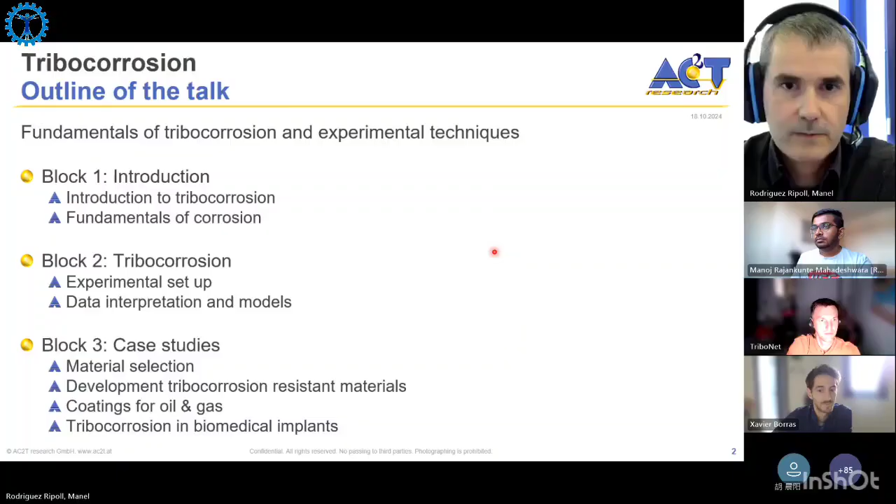Starting with the first block, the introduction, I would like to define what is tribocorrosion. Tribocorrosion is the material degradation due to the action of wear in a chemically reactive environment. It means we have a material in a place that is chemically reactive, and wear occurs simultaneously with potential chemical reactions that can occur with the environment.

This can be because the material is in an aqueous solution, in an electrolyte, in an acidic media, because it's in hydrogen environment, because it's in ammonia, or because it's in CO2 or H2S corrosive environment.

So this is probably the main difference with tribochemistry. In tribochemistry, you have chemistry because you have shear stresses. If you don't have the shear stresses, you don't have the chemistry typically. So it's a chemical process activated by shear forces.

In the case of tribocorrosion, the material reacts with the media, even if you don't have any mechanical wear. But when you have wear and the material simultaneously reacting with the environment, then that's what we talk about as tribocorrosion.

And here we need to talk about the kinetics of the process, because if you have a process where the wear is progressing much faster than corrosion, probably you can ignore corrosion, or vice versa. If you have a wear process that is much lower when compared to the corrosion progress, then you can ignore wear and probably you have a pure corrosion process.

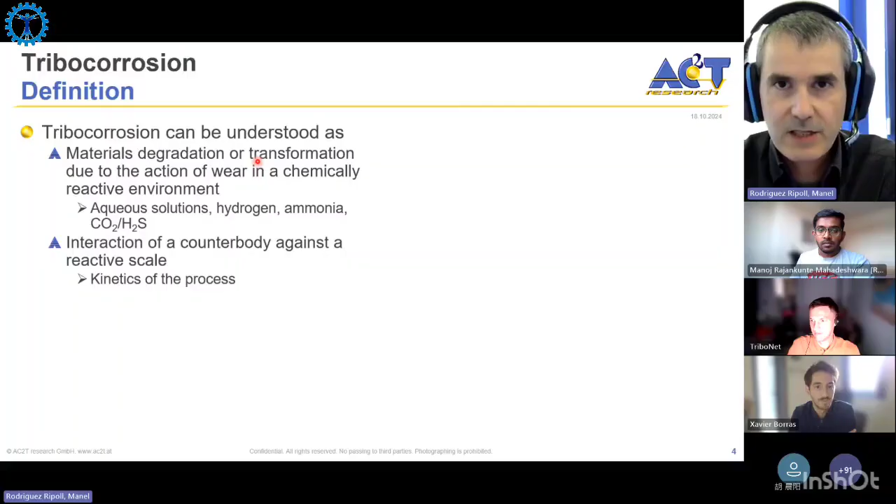So this plays a bit, but basically what we will focus on today is the synergy, and this synergy is most visible in passive metals, because passive metals are metals that are corrosion resistant.

These metals are used to protect components against corrosion, and they rely on the spontaneous formation of a passive layer. When we mechanically destroy this passive layer, we have the paradox that a metal that should be corrosion resistant starts corroding. That's the place where tribocorrosion is most obvious, and it's the place that has been most intensively researched in recent years.

And this occurs in many industries, ranging from biomedical to offshore, marine, the food industry, even in magnetic devices you can have tribocorrosion, in cutting tools, or you can have desired tribocorrosion. So you can exploit tribocorrosion processes in chemical mechanical polishing for producing very smooth samples.

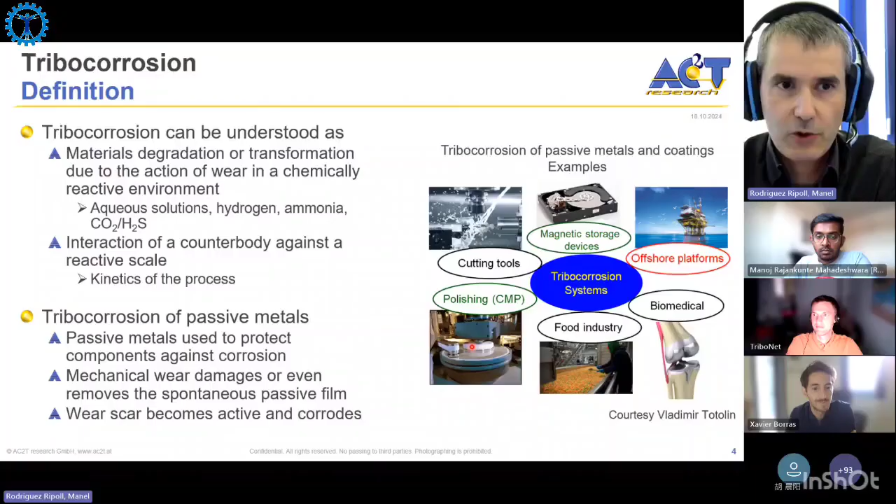So tribocorrosion does not always need to be negative. And the main challenge when we talk about tribocorrosion is that to select materials that are able to control tribocorrosion, to be tribocorrosion resistant, we cannot rely on separate corrosion and wear evaluations.

So if we take a material that is corrosion resistant and we take a material that is wear resistant, we cannot automatically assume that this material will be resistant against tribocorrosion.

One paradigmatic example is titanium nitride coatings. This is a coating that has excellent wear resistance, used in many cutting tool applications. It also has very good corrosion resistance in most aqueous environments, but it is a material that is very prone to tribocorrosion.

You can see, for example, in this graph the removed wear volume as a function of the electrode potential. For example, if you have cathodic potential, where mostly corrosion is inhibited, we have very low wear, close to the pure mechanical wear.

And when we apply an anodic potential, the tribocorrosion wear can be up to 2 orders of magnitude larger.

So it means that we need to use tribocorrosion methods to evaluate materials that are suitable for tribocorrosion applications. The separate consideration of wear and corrosion will very often be misleading.

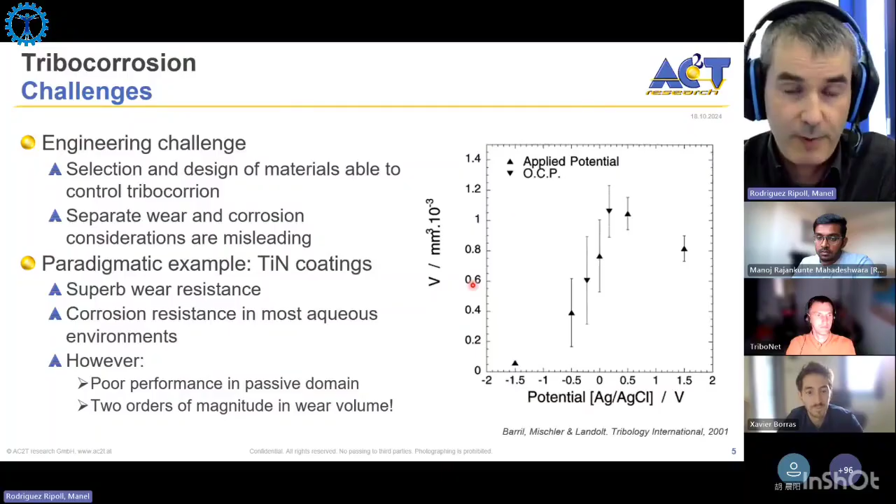And in order to tackle these tribocorrosion challenges, I will give a very brief introduction to some fundamentals of corrosion very quickly—a bit superficial, but so that you know the main concepts that I will be talking about later.

The most important thing to realize when we have metals exposed to the environment is that very often they degrade by corrosion. We know, for example, the example of ships in marine applications, pipelines, bridges. All these materials end up having this kind of rust because they react with the environment.

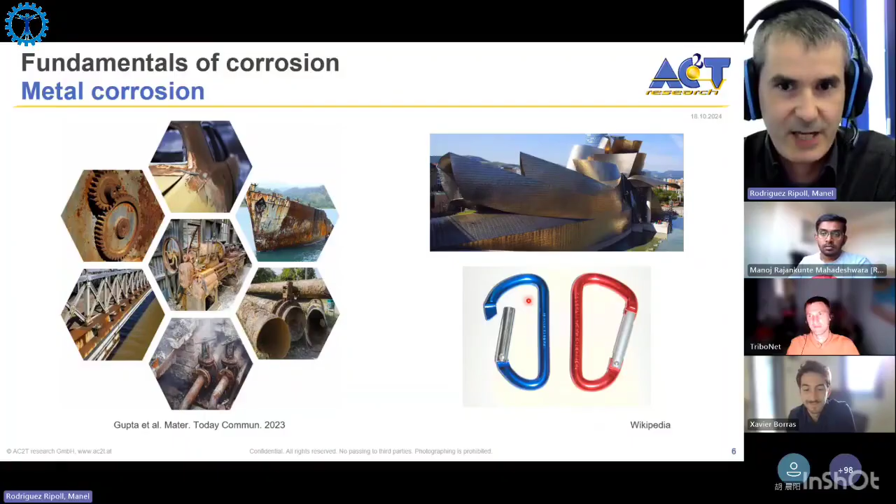However, many other materials are exposed to the environment, like this roof of the Guggenheim Museum in Bilbao, or these aluminum components, and actually they do not get any rust. So why is that? This is because there are different processes involved.

Some metals, when they get exposed to an electrolyte, basically dissolve. So you have a metal that turns into an ion and emits some electrons. For example, iron—you have a piece of iron, and some atoms of the iron will dissolve into the electrolyte and emit electrons.

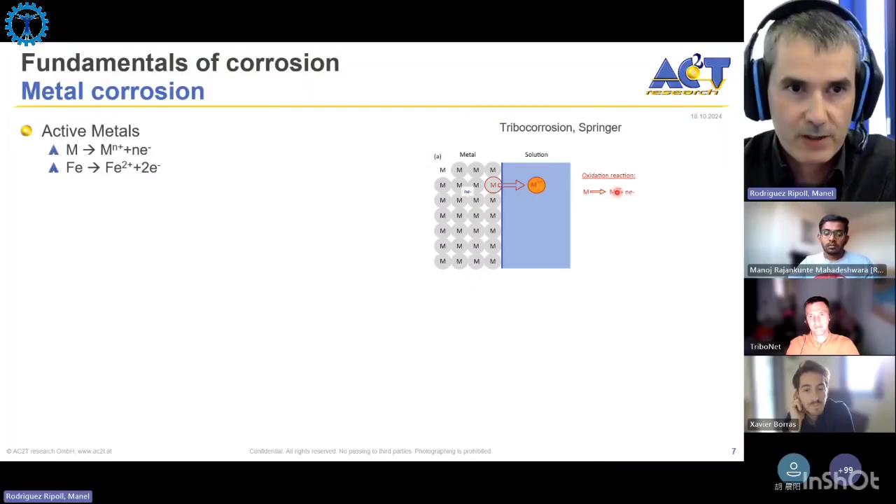However, other metals build up a spontaneous passive layer. Basically the process, if you sum it up, is the same: a metal ends up having a dissolved metal ion and some electrons. But this is done in two different steps. The first step is an oxide formation, where the metal reacts with water and forms an oxide layer with the emission of some protons and electrons. Then in the next step, this metal oxide can dissolve, react with the protons, and end up dissolving, releasing water again.

This is, for example, the case of aluminum. That's the reason why aluminum components look shiny after exposure to the environment. Aluminum reacts in aqueous solutions to form a spontaneous passive aluminum oxide layer, and this oxide dissolution is a very slow process. That's the reason why these metals do not really corrode.

What happens with the electrons we generate in these anodic reactions? We need to have a cathodic reaction as well, where these electrons get consumed. If we are in neutral or alkaline media, we have the oxygen and water reduction equation, where these electrons get consumed. Or if we are in acidic environments, the electrons can combine with protons available from the acids to form water. So basically, you emit electrons in the anodic reaction, and in the cathodic reaction you consume these electrons. These reactions occur simultaneously.

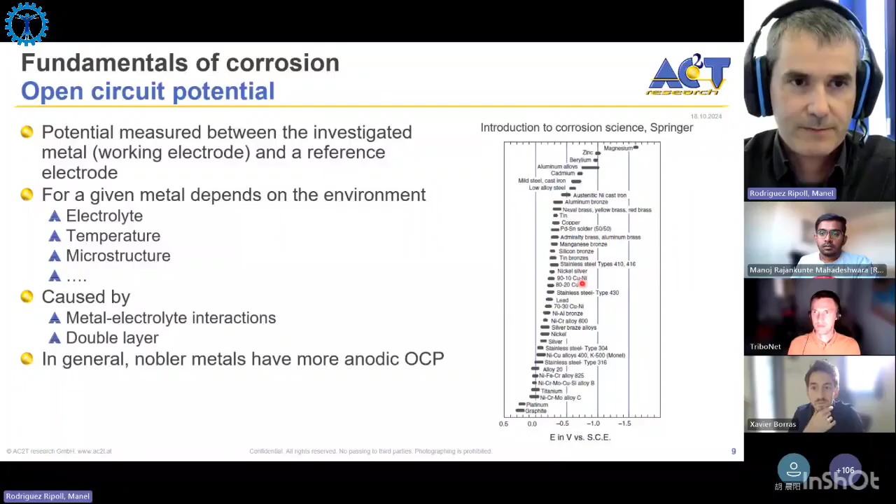So if we have the metal at its open circuit potential, and we want to change that potential, of course the metal will not like it. If we set the potential to the open circuit potential, the metal will be fine and we don't need to do anything. But if we want, for example, to increase the corrosion of the metal immersed in the fluid, we will need to remove electrons, and by this we will increase the anodic corrosion. So basically we need to supply a current to sustain this potential, because they are not in equilibrium.

If we put an anodic potential, what we are doing is removing electrons from the metal, so we are promoting the anodic reaction and increasing the corrosion of our metal. If we apply a cathodic potential, a negative potential, we are supplying the metal with electrons, promoting the cathodic reaction at the surface, and we have an increase in current dominated by the cathodic reaction. In the anodic range, we increase corrosion as we increase the potential.

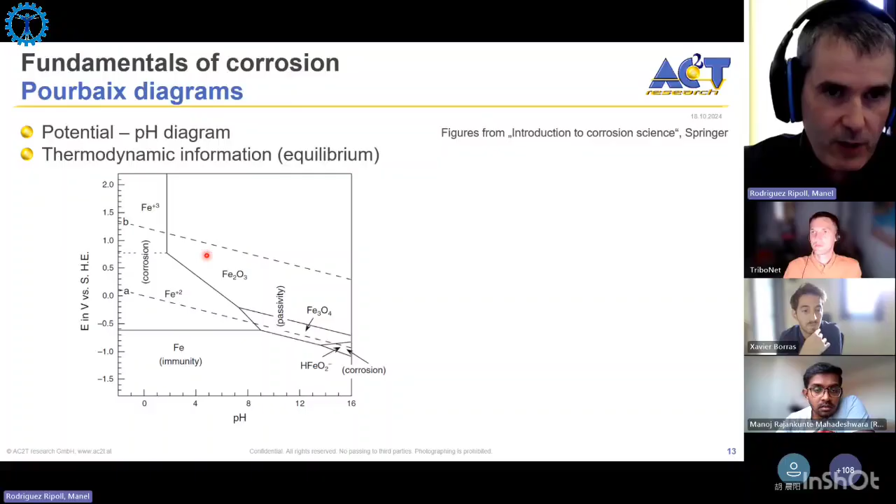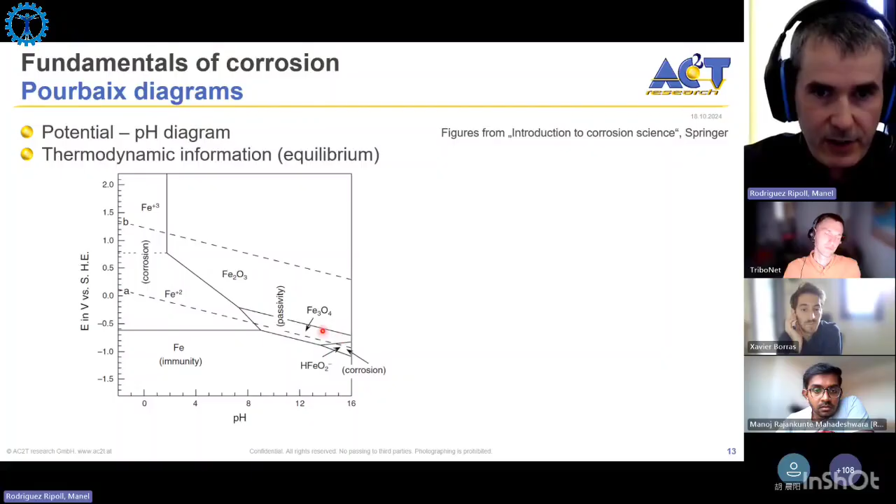For example, if we have iron, in this domain we will have passivity. So for example, here at moderate pH we will have the formation of Fe2O3. Here at lower potentials and higher pH we will have Fe3O4. Here we will have a very high pH corrosion. Here under cathodic protection we have immunity. And we can have this, for example, this representative way.

This was written by a colleague of Marcel Pourbaix, who invented these diagrams, and in a graphical way you have regions for certain applied potential and pH where you have passivity. So you put the corrosion devil into the jail, thanks to this passive layer formation. And here we have cathodic protection. So here basically we are breaking the tools of the devil, of the corrosion devil, and here we have immunity due to cathodic protection. Here in this little regime where we have corrosion at very high pH, then we also have the devil again. So that's a funny way of how to read a Pourbaix diagram.

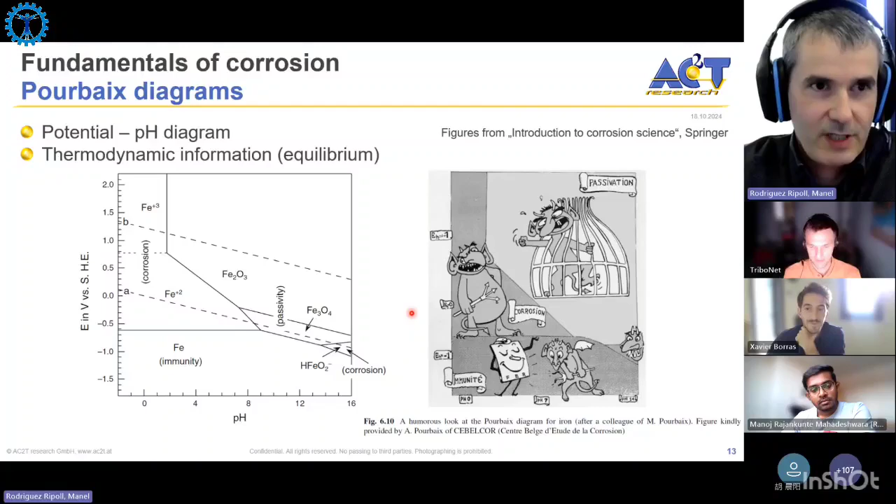But the Pourbaix diagram gives us information about which reactions are thermodynamically possible, but does not give us any information about the kinetics. So the kinetics is given by the polarization curves. So this is a bit the information that I wanted to give about corrosion. So we will use now these concepts in the next part of the presentation. If there are some questions, maybe a short question, 2 or 3, I can reply to them now before proceeding. If not, at the end, I will also be available for further questions.

As far as I know, I don't see any question in the chat. Yeah, no questions. Maybe I can ask one interesting for me, about this titanium metal. So in this graph from corrosive metals, it was one of the good ones, but then you also mentioned that it sometimes still corrodes. So I'm wondering, why is that?

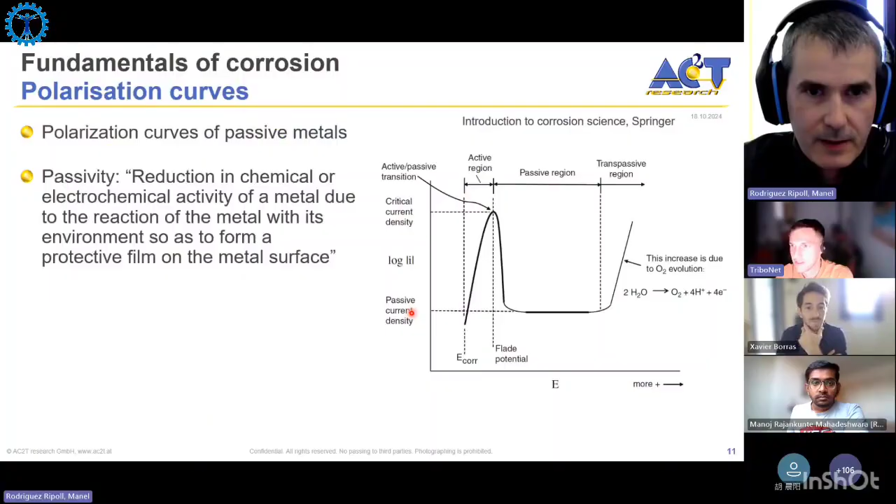So basically, when you have these passive metals, you still have dissolution, but of course the rate of this dissolution is smaller. So you still have metal dissolution, but this dissolution is done in two steps. So first you have the oxide formation reaction, and then you have the oxide dissolution. So you have an equilibrium where part of this aluminum or titanium ions are dissolved in the electrolyte, but of course the corrosion rate is much smaller than if you put, for example, magnesium in an electrolyte, where the corrosion rate will be much larger. But even for passive metals, you still have some ions going into the electrolyte and reaching an equilibrium between the ions dissolved and the ions reabsorbed. So it's basically the same, it's just the rate that is different. So the process is the same, but the rate is the big change here. The corrosion rate is the key.

That layer, is that weaker? So this layer in passive metals typically has a few nanometers. We're talking maybe 2 to 5 nanometers. And it depends on the conditions how this passive layer is formed and on the electrolyte where the material is immersed, but typically it's a ceramic. So, for example, in aluminum it is aluminum oxide, in titanium it is titanium oxide, but it can be broken, of course, during rubbing, and it does break. And that's the reason why when you break this passive layer, you expose the naked metal to the electrolyte. And then, of course, the corrosion rate will not be this one, but will be something closer to this. So that's the point here.

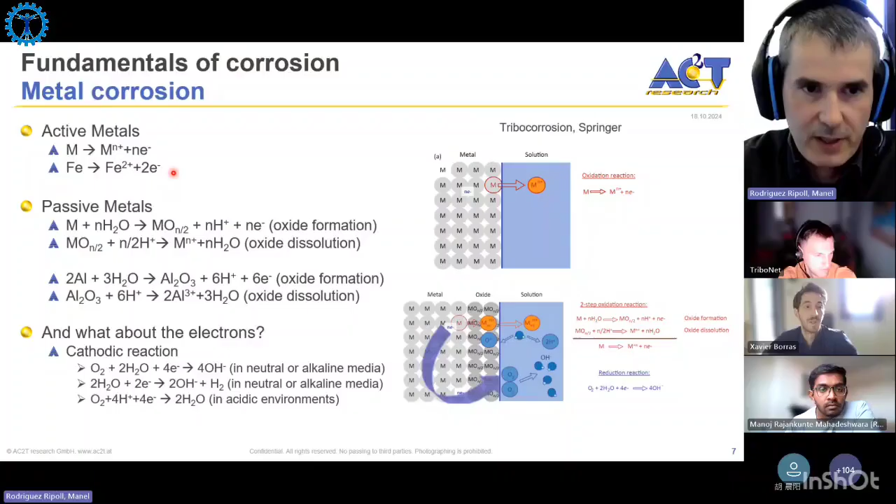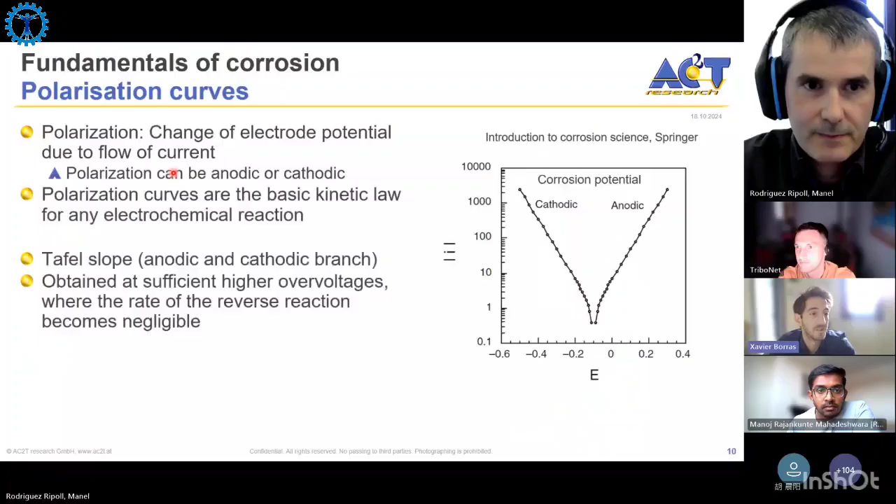So we will continue. Now I would like to talk about tribocorrosion itself, about some experimental techniques and how to interpret the results that you get in tribocorrosion, and which models exist.

So the most simple tribocorrosion experiment that we can think about is: you have an electrolyte, some seawater, some acid, or some reactive environment. We have a metal immersed in this environment, we have a ball or counterbody, we load and we start sliding. By this we impart the tribocorrosion, and at the end of the experiment we can see how much tribocorrosion wear there is, and we can see the damage mechanism.

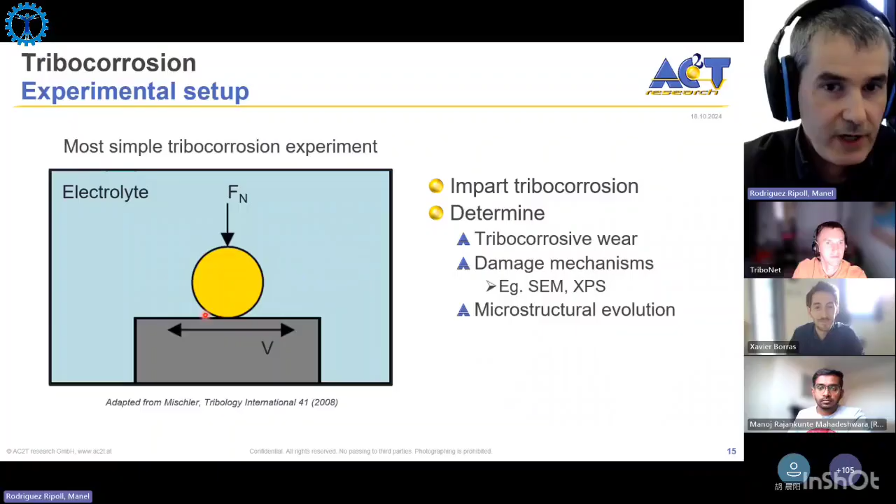We can see, for example with SEM, how the wear scar looks like. We can check with XPS how the chemistry of the wear scar looks compared to the unworn part. We can see how the microstructural evolution is occurring in the cross section. So we can really learn a lot of things, but still we cannot learn enough.

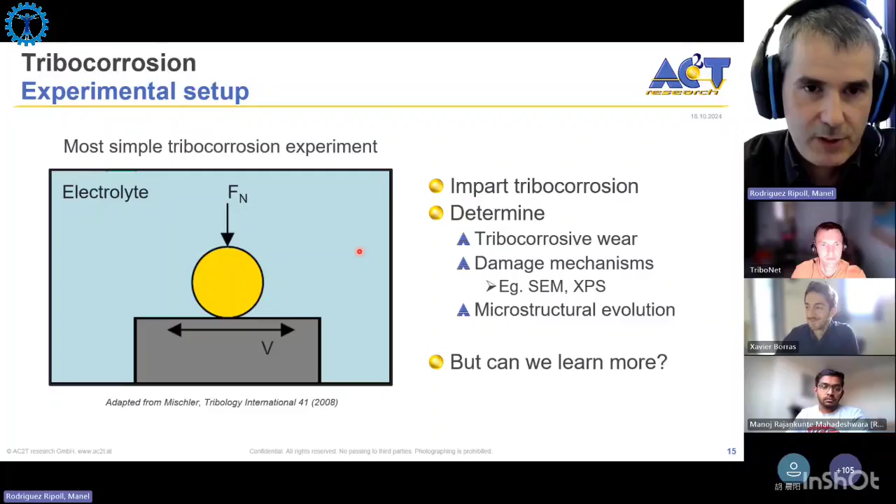We have seen that when we put this metal in the electrolyte, we have the spontaneous formation of one potential. So maybe one thing that makes sense is to see what happens with this potential: measure it, track it, and see how it's evolving. For this we need a setup that typically looks like this.

So we have a tribometer coupled to an electrochemical cell. In the electrochemical cell we have 3 electrodes, can be 2 if you don't need to measure currents or apply any voltage. This 3-electrode electrochemical cell has a reference electrode, which is an electrode with a known and stable potential, where all the potentials will be referred to. We have a counter electrode, which is a noble metal, typically platinum, can be graphite for example, and the working electrode will be our sample.

This 3-electrode setup is connected to a potentiostat that can measure the voltage or can apply a certain voltage by triggering some current. Then you have a data acquisition system to acquire the data from the potentiostat and the tribometer, and by this you measure what happens with the current, the potential, and you can also monitor coefficient of friction and other typical parameters during a tribological experiment.

And what we very often use, this white little fellow here, is an aluminum oxide ball. Typically in tribocorrosion experiments we use aluminum oxide or a ceramic counterbody. The reason is because we want a stable counterbody that isn't wearing too much. Another reason is also that we don't want this counterbody to create a galvanic coupling with our sample, because we've seen that when you have a galvanic coupling, you may change the cathode with the anode depending on which material you use, so you can change basically the electrochemistry of the system.

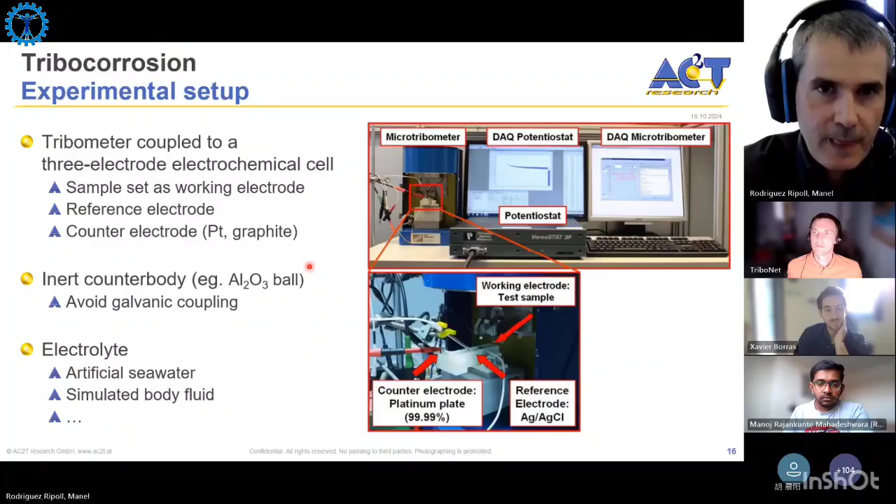If we do something like this, for example, with only 2 electrodes, we don't need to apply any voltage. We do the same experiment as before: we have a ball, a plate, and everything is sliding. The only difference is that we measure the voltage between the reference electrode and our sample. Then we can track this spontaneous potential built by the metal, which is the open circuit potential. Before the experiment, before sliding, it's stable and has a certain value.

If we have a very little load of 10 millinewtons, when we start sliding, basically nothing happens. It means we don't have any change in the passive layer or in the surface composition of our material.

If we apply a higher load of 100 millinewtons, we see a shift of the open circuit potential towards cathodic values. We see that this is not stable, so the potential sometimes goes back up to higher values. The depassivated area tries to repassivate again, so you have these instabilities, and at the end of the experiment the open circuit potential returns to the initial value because the material is repassivating. So in the same electrolyte, the material spontaneously builds up again the passive layer that was mechanically broken, establishing the same equilibrium condition as before sliding.

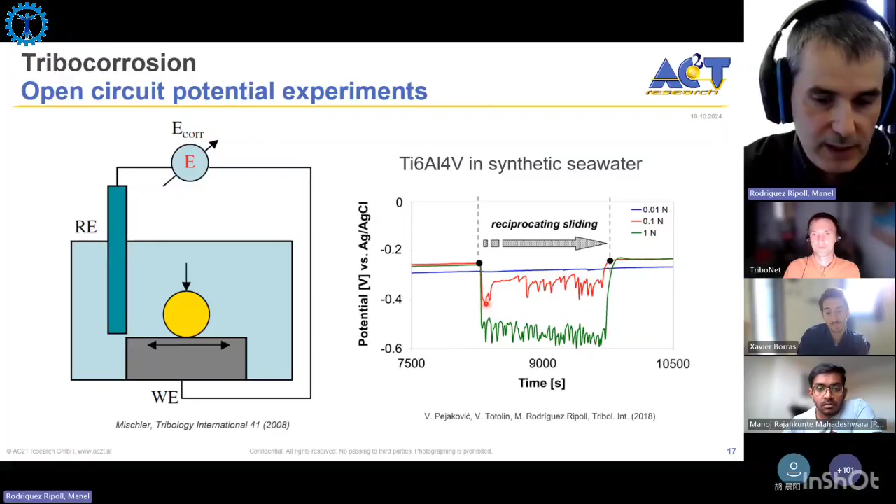We won't go into much detail, but you can also get quantitative data from open circuit potential experiments. This was proposed in a model published in Corrosion Science 12 years ago by Vieira and collaborators. The model basically relies on what I just mentioned: you have the depassivated area, which can be fully depassivated or only partly depassivated, and you end up building a galvanic coupling between the non-passive part and the passive one.

This area behaves as an anode, this one as a cathode, and under OCP conditions we don't have any current—we've seen before that it's in equilibrium. We need to have a current if we want to impose a potential, as we've seen in the polarization curves, but locally we have currents. The total current is zero, but locally the currents cancel each other out, meaning the anodic current density equals the cathodic current density, and this current density is the total current normalized by the area.

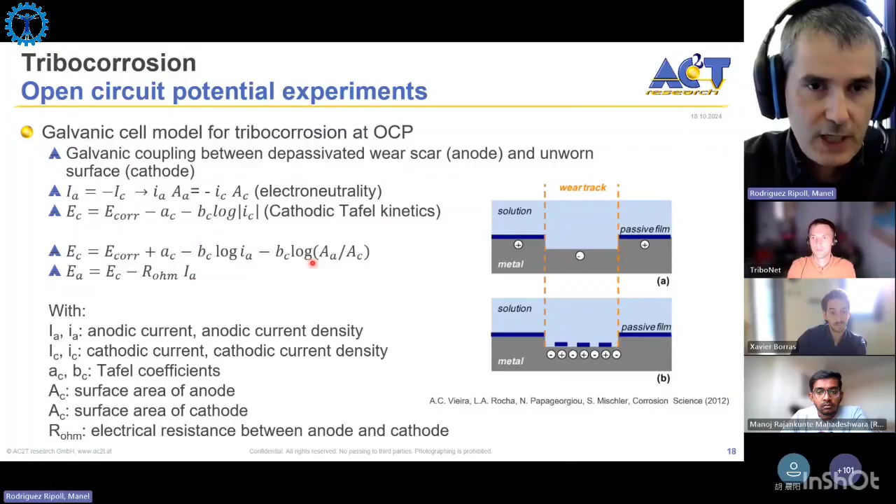If you assume electroneutrality and the Tafel kinetics we talked about before, using the slopes of the anodic and cathodic branches, you can derive an equation where you know your anodic area, which is basically the worn area, and the cathodic area, which is the area outside the wear track. You get these Tafel coefficients experimentally from the slopes, and by knowing all of this, you can correlate, for example, the cathodic potential—if you know the corrosion potential, you can see how the cathodic potential evolves with time.

The only parameter you wouldn't know is the anodic current, required and triggered every cycle for repassivating the worn area. You can track, calculate, or estimate this anodic current density by plotting this data. This is a quantitative model. You have all the equations here in the paper with all the explanation, but you can also get quantitative data out of these open circuit potential experiments.

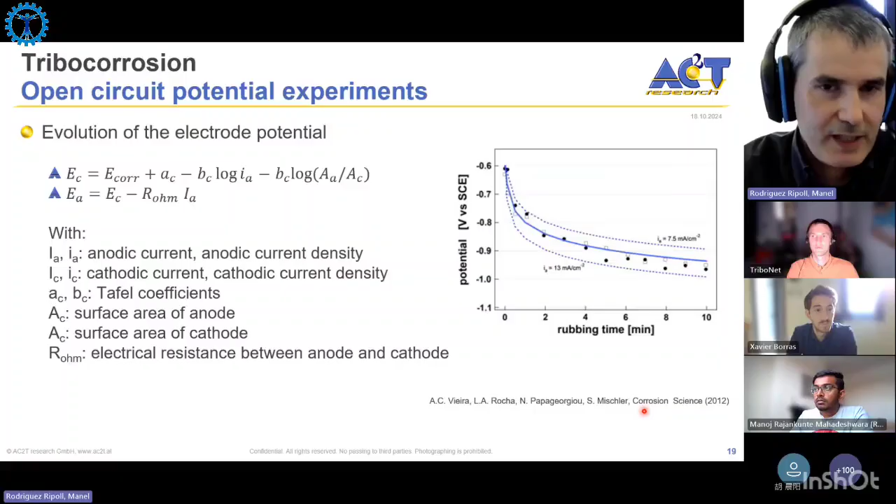It's usually not done, so typically OCP experiments are discussed qualitatively, but it's possible to get quantitative data. The place where typically quantitative data is usually obtained is using potentiostatic experiments.

With potentiostatic experiments, we are forced to have three electrodes. We need the material that is investigated, which is the working electrode. We have a counter electrode that is typically a noble metal, platinum or graphite, and the reference electrode, a stable material not reacting with the media with a well-known potential, where we refer all other potentials.

If we apply a potential, we saw before that in the passive domain the current is very low, in contrast to active materials, where we saw this anodic branch, where the current was logarithmic, exponentially increasing in this semi-logarithmic plot with increasing voltage.

In this polarization curve, we have seen that for passive materials in this semi-logarithmic scale, the passive domain current density is independent of the applied voltage and is very low. It means that if we apply this passive domain voltage, for example plus 0.5 volts, to titanium in synthetic seawater, the current is very low because we have dissolution, but it's very small compared to active metals.

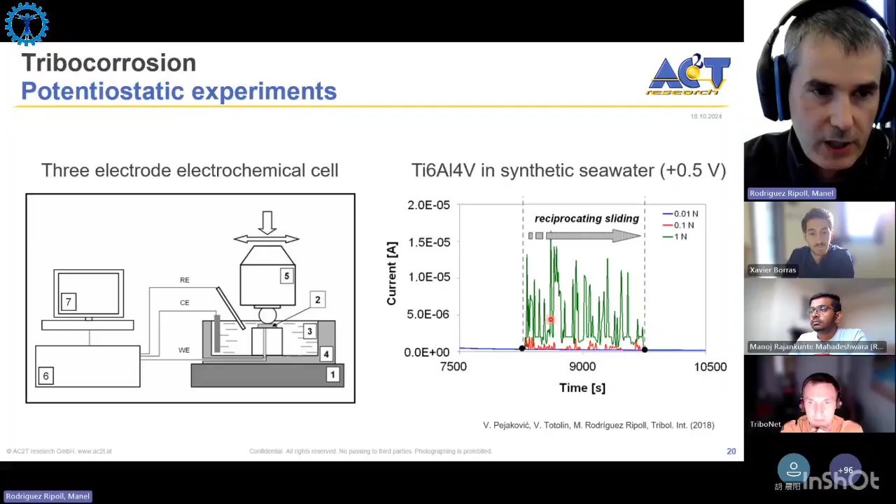What is typically done to get quantitative data is to integrate this current, because when you make the integral of the current, you get the charge. By knowing the charge, we will see that you can get the corrosion. One of the most common models used to interpret this data obtained under potentiostatic conditions is the model proposed by Uhlig in 1954.

Basically, it assumes that when you rub a passive metal, you destroy the passive layer, and the total removed wear volume by tribocorrosion has basically two contributions: one due to mechanical wear, the formation of wear debris as we would have in other wear experiments, and the chemical wear.

The chemical wear outside the wear scar we can neglect, since passive metals have very small passive dissolution. We can assume that most of the chemical wear is coming from the depassivated area in the wear track. In these potentiostatic experiments under passive applied potentials, we can measure the total removed volume at the end of the experiment — the volume we would measure using profilometry or confocal microscopy.

The chemical wear we can calculate using the Faraday equation. We have the charge, which is the integral of the current measured with the potentiostat, the atomic mass of the metal, the valence of the metal, and the density. These are constants we can check in books, well known for the metal we have, and the Faraday constant is also well known, so we can calculate the chemical wear.

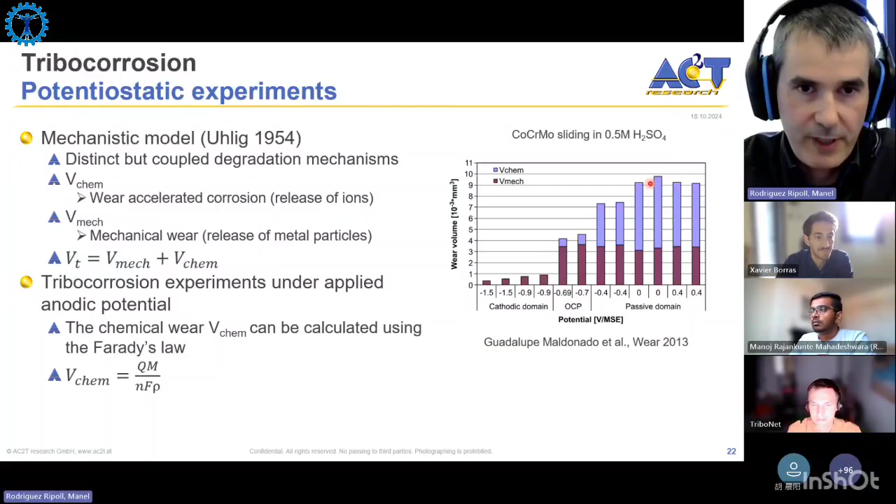And then you can understand how the material is degrading under tribocorrosion conditions as a function of the applied potential in the different electrochemical domains. There is another model, originating from the erosion corrosion community, called the synergistic model. The approach is similar, but somehow slightly different.

So basically this model assumes that the total loss due to tribocorrosion, erosion corrosion, or whatever, so the total mechanical wear in a corrosive environment has three contributions: a pure mechanical wear or erosion, a pure corrosion term that's only due to electrochemical process, and a synergy term. This synergy is the action of the combined mechanical and corrosion processes.

And this synergy you can decompose into two additional terms. One that could be the corrosion enhanced erosion or wear - the wear that is enhanced due to corrosion processes, for example, because your material gets weaker as it gets corroded. And the erosion enhanced corrosion, something related to wear accelerated corrosion - the corrosion that's triggered by mechanical damage of the passive layer.

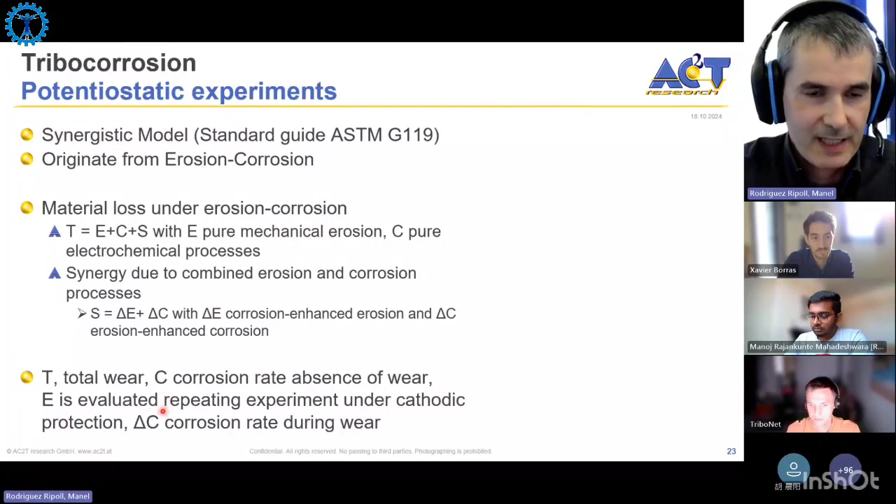Then you can measure, for example, the total wear that you measure by profilometry. The corrosion rate in the absence of wear, you can get from polarization curves without rubbing. The pure mechanical wear is what you could get under cathodic protection, and this synergetic term of wear, this erosion enhanced corrosion, you can get from polarization curves during the wear process.

So the main critique - this model is still very widely used in literature nowadays, but the main critics arise from the difficulty to interpret these terms, to have a real physical meaning for them, and also the challenges to get these quantities experimentally.

Because if you want to get pure mechanical wear, you apply cathodic protection, but it's known that depending on the cathodic potential you apply, you may change the wear rate. So then which is the correct wear rate? Depending on the cathodic potential, if you start generating hydrogen in the cathodic reaction and your material is sensitive to hydrogen embrittlement, you will change the wear.

And therefore, it's not very well defined what this pure mechanical wear means, just by applying cathodic protection. So you can change it depending on which potential you apply.

Also, to get the polarization curve during the wear experiment, you have the problem that the polarization curve takes some time to be measured, and normally the scan rate is small. During this time, you can trigger the formation of wear debris, form third bodies, and change your microstructure. So maybe at the end of your polarization curve, your metal is different than it used to be at the beginning. These are probably the main critics of this model.

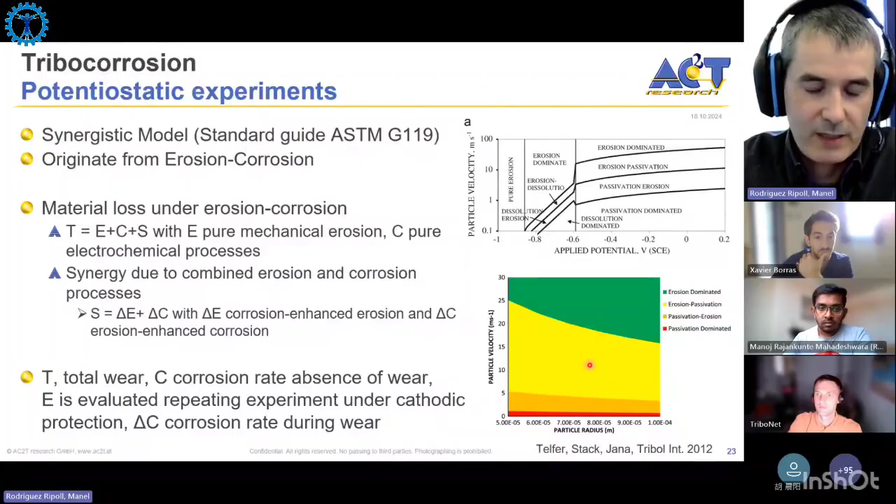So you can get a lot of valuable information, but as I mentioned, the model of Uhlig, at least for me, when I show this mechanistic model, seems to be easier and more straightforward to interpret and to get data quantitative.

The last slide shows what is determining tribocorrosion wear. There is a nice paper from Stefano Mischler and Ana Munoz, where they make a big assessment of different tribocorrosion experiments performed on cobalt chromium for hip joints using model experiments, tribometers and simulators. As a function of contact pressure, there is a certain trend to increase wear, but it's not always the same. The wear rate in a tribometer is much higher because usually you have point contact, while on the simulators you have more conformal contact.

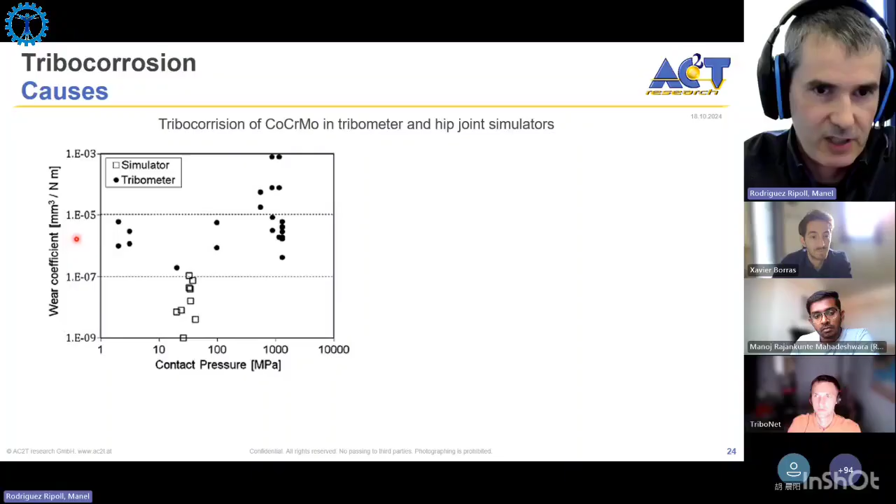These kinds of master curves in tribocorrosion are well known: you have lower wear in the cathodic domain, the total wear we're talking about here, and the highest wear in the passive domain.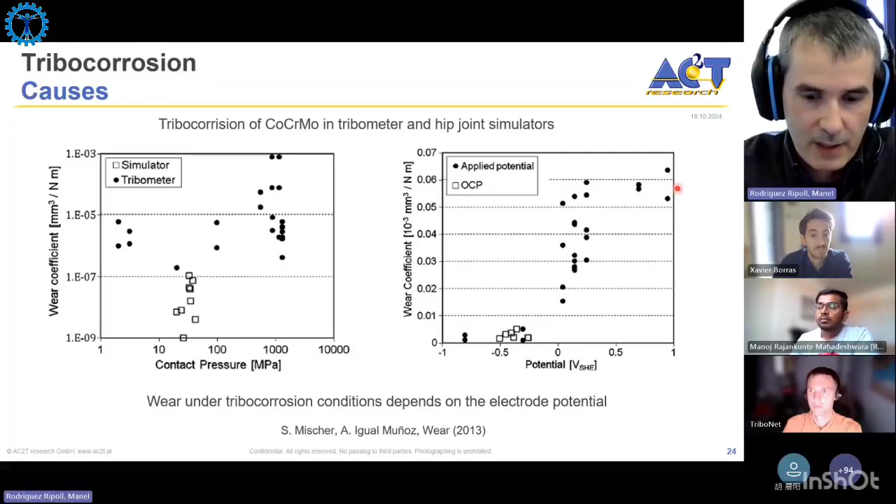So with this, I am at the end of this second part, and I will be willing to reply to some of your questions now. Yeah, there are some questions, but they are for the previous section. I think maybe we can go through those.

What are the prevention measures for tribocorrosion in ferrous metals? Basically what you need to do is select a metal that degrades the least possible in the medium, so that it has good passivation kinetics, and for example that it's inert. I was doing a review a couple of years ago on coatings for tribocorrosion applications, thin coatings, and we saw today that titanium nitride has very poor tribocorrosion properties. On the other hand, DLC, which is a more inert material, performs much better under tribocorrosion applications. So one possibility is to have a material with different kinetics. For example, chromium nitride, due to its repassivation kinetics, is also very suitable for tribocorrosion applications, and chromium nitride coatings perform much better compared to titanium nitride under tribocorrosion applications. So you can use different materials, but the tricky point is that you cannot rely on pure corrosion or pure wear experiments to determine which of these materials is most effective for tribocorrosion protection.

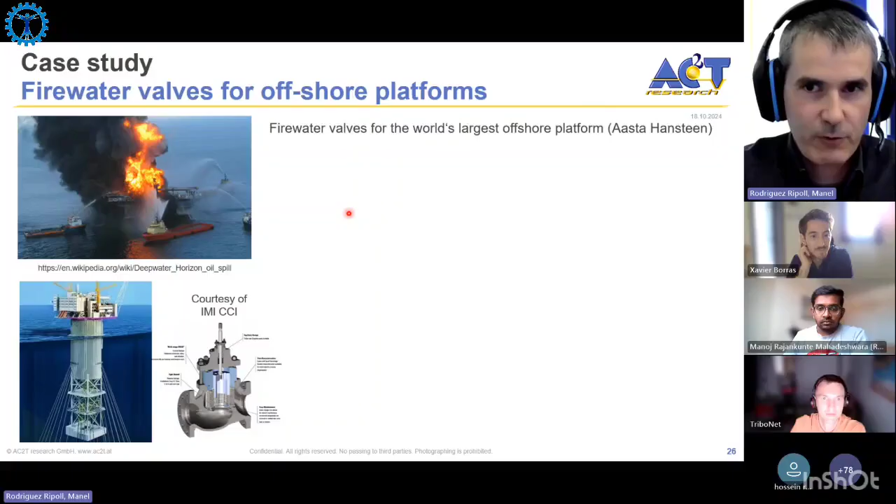Here is an example of how you can use simple open circuit potential experiments for screening different surface treatments. We were evaluating DLC coating — tungsten-doped DLC — thermal spray coating deposited by high velocity oxygen fuel, and a nitride layer done by ion implantation, by plasma nitriding.

With these different materials, using titanium as a reference, you make open circuit potential experiments, as we've seen before, very simple. From these OCP experiments, you get the evolution of friction as a function of time for the different surface treatments, and the evolution of the open circuit potential as a function of time.

You see here the different OCPs before rubbing, during sliding, and after sliding. Based on the OCP behavior, the friction behavior, and the total wear measured at the end of the experiment, you can use this data to make suitable selections.

For example, the nitriding layer has a very high and very noble open circuit potential at the beginning of the experiment, but this potential dramatically decreases. The reason is that you break this nitride layer during the experiment, and the material becomes less noble as you go into the diffusion layer where titanium combines with titanium nitrides. At the end of the experiment, you cannot repassivate because this layer is destroyed — that's why the final OCP is lower than the initial one.

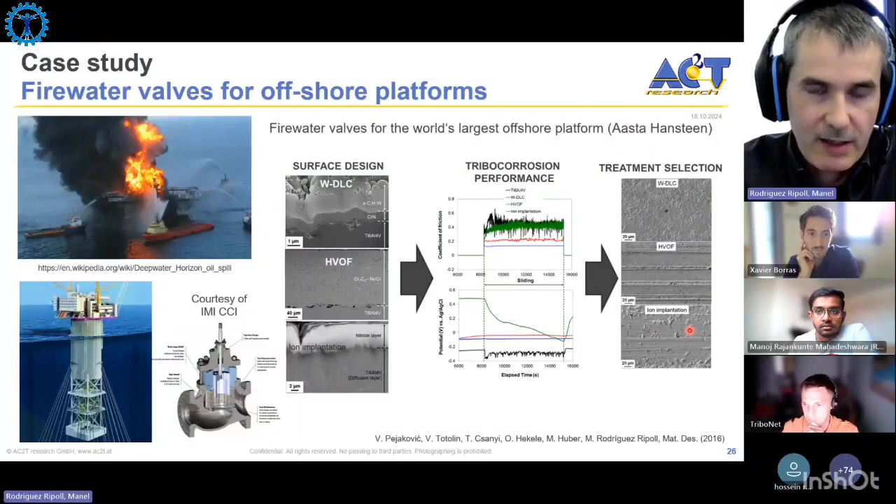Based on this information, and on the total removed wear volume, you can get the data needed to decide which material has the best tribocorrosion performance.

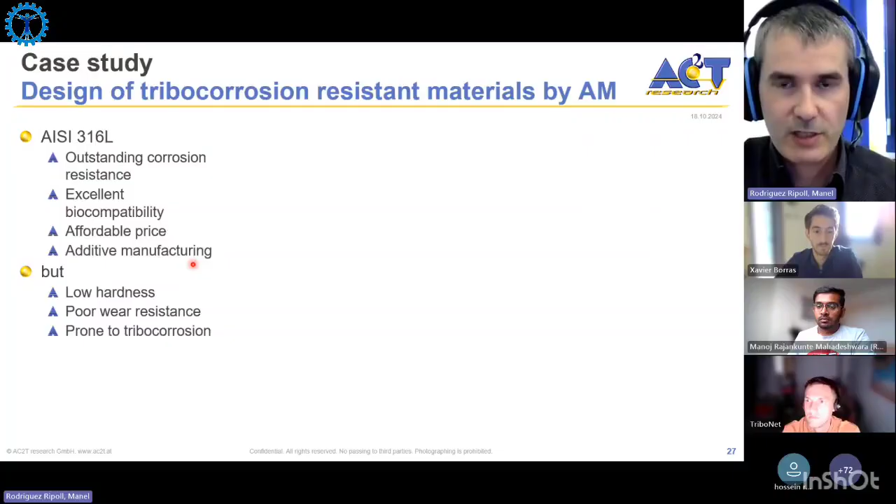Another case study I'd like to share is the design of materials resistant to tribocorrosion, deposited by laser metal additive manufacturing. We were working with 316L stainless steel, a material similar to titanium 6-4, with outstanding corrosion resistance and good biocompatibility. It's very affordable compared to titanium and can also be deposited by additive manufacturing, but it has very poor wear and tribocorrosion resistance. The idea was: is it possible to improve the tribocorrosion resistance of this 316L?

This was done in collaboration with the Fraunhofer Institute of Ceramic Technologies in Dresden. They developed this titanium carbonitride nickel powder. We selected titanium carbonitride because titanium carbides or titanium-based carbides are sustainable, don't rely on critical materials, and have very low density and an affordable price.

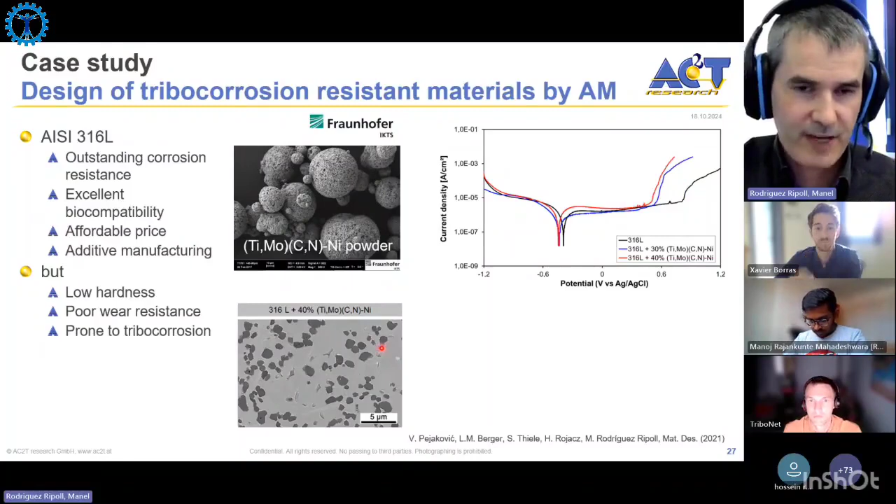What we did was investigate different composites, or cermets, having a 316L matrix with different concentrations of titanium carbonitride. One thing we checked was that the material doesn't lose passivity under static conditions without rubbing - this is just the polarization curve. We see that 316L has a passive domain, and these other compositions containing 30 and 40% titanium carbonitride inclusions still have a passive domain. The only price to pay is that the transpassive breakdown potential shifts towards cathodic values, meaning the material will be a bit more prone to pitting, because these defects act as initiation sites for localized corrosion - but still you have passivity, so this is quite good.

I'm showing here the wear scars after the tribocorrosion experiments. These are OCP, meaning we didn't apply anything, just followed the potential as it was established spontaneously. You see that with increasing concentration of titanium carbonitride, the tribocorrosive wear volume gets smaller. This is even true if you apply a passive potential - though under an applied passive potential the wear in general is larger compared to OCP - even under these more detrimental conditions, the material performs much better compared to the unreinforced 316L.

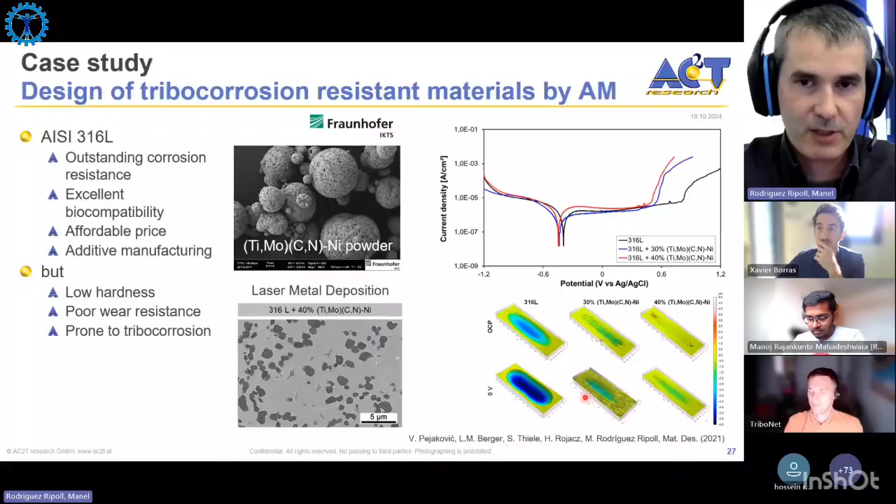So you can also use the same concepts of OCP and potentiostatic experiments for investigating or designing tribocorrosion-resistant materials. Another thing you can do is get measurements like these we did at 3 bar CO2 pressure.

This is a bit different - we have sodium chloride at 3 bar of CO2, so we have CO2 corrosion. It's slightly different, I won't go into much detail, but we get the formation of iron carbonates because we don't have oxides. So for the iron alloys we're promoting the formation of carbonates, and we don't have oxygen dissolved, so we're working under anoxic conditions.

We were evaluating different corrosion-resistant, wear-resistant coatings. It's interesting that for these different coatings, there's a general trend that tribocorrosion wear volume gets smaller for increasing hardness. You can see the trend, but you can pick out two materials - this iron-based alloy and this nickel-based alloy - these coatings have very similar hardness, around 800 Vickers, but one has much lower tribocorrosion wear under CO2 conditions compared to the other.

The reason for this, something I haven't touched on much today but is very important in tribocorrosion, is checking the microstructure after the experiments. Here's a cross-section - this is the sliding surface, you can see some sliding grooves. This iron-chrome-boron-silicon plasma spray coating is prone to selective corrosion along the grain boundaries, which is responsible for its poor tribocorrosion performance. Whereas this nickel-chrome-boron-silicon coating, in the wear scar you hardly see any scratch or groove, and in the cross-section you can see maybe some small superficial cracks, but very little damage. That's why these two materials, despite having very similar initial hardness, differ so much in their tribocorrosive wear resistance.

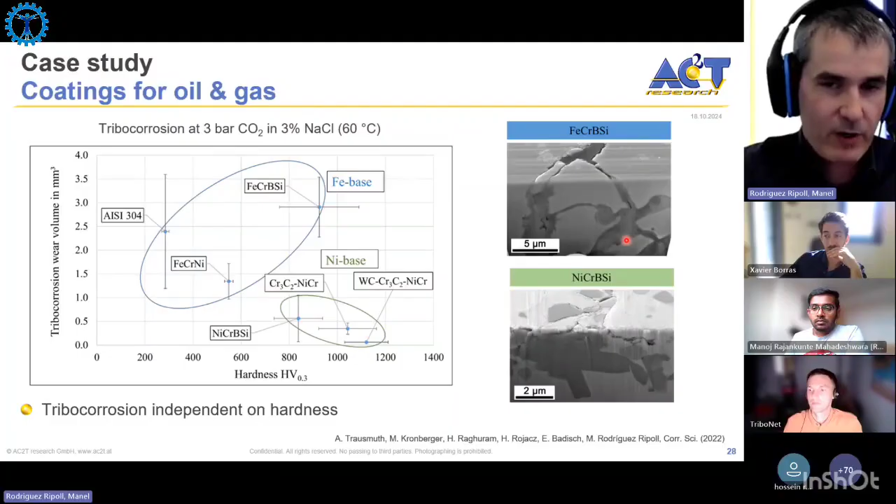To conclude, the last case study I'd like to show is one of my favorite projects - tribocorrosion of partial implants. A partial implant is basically a localized replacement of damaged cartilage.

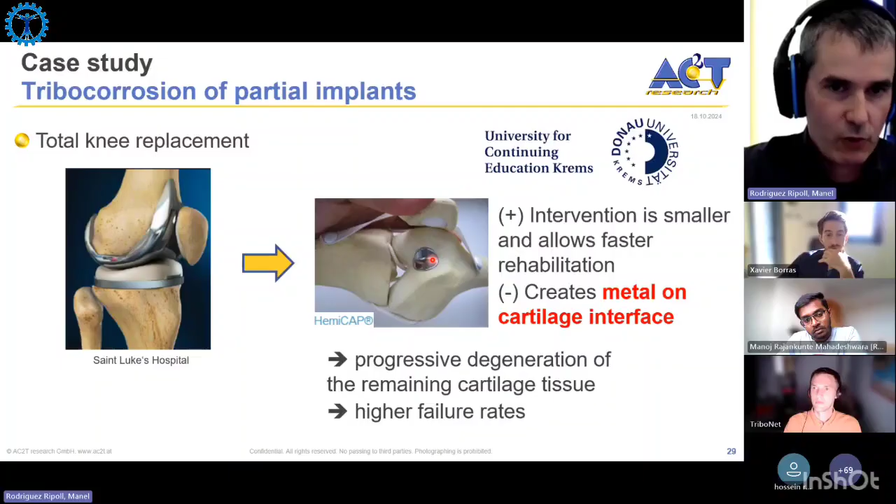So instead of having a full knee replacement, you have only a little part here of cobalt chromium that is placed to replace damaged cartilage locally, but the rest of the joint is left unaffected. And the problem here is that you create a metal on cartilage interface, and we were asking ourselves if you have also metal release or tribocorrosion here in a cartilage to metal contact, cartilage being very soft.

And what we did here was in vitro experiments, quite challenging. So we were having not only the mechanical wear under control, also the electrochemical conditions were kept under control, but also the biological. So we were having live samples from a bovine that were immersed in this solution that contains nutrients, contains antibiotics to ensure that the cartilage is alive. So we can keep the cartilage alive for a couple of days.

We tested all the samples within the first 2 days after extraction and used these cobalt chromium cylinders as counterbodies. Here you can see this is the reciprocating sliding setup. This is the counter electrode, the reference electrode. And you can measure, for example, the friction, which is 0.03, so very smooth, very low friction. So cartilage is an excellent material.

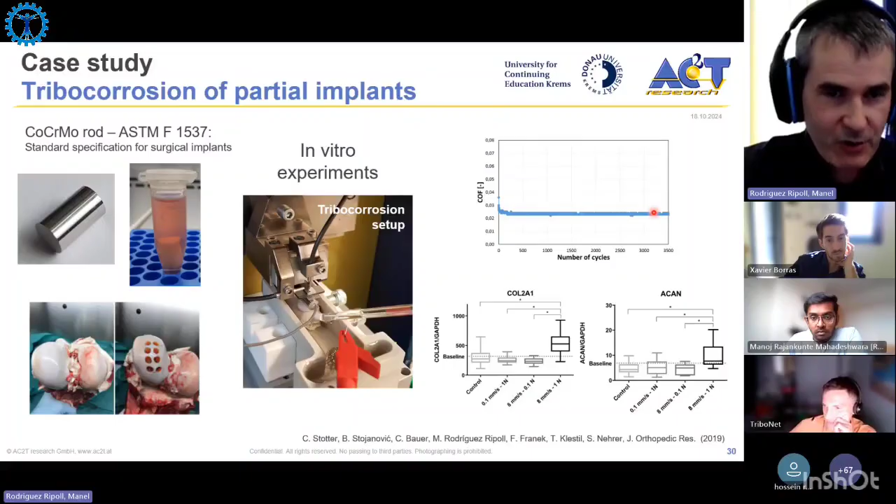Then the guys from the medical faculty can do this cartilage gene analysis. So basically you can see if the cartilage feels good for certain sliding conditions, or doesn't feel good. So these are, for example, some genes that are expressed depending on the conditions. In this case, they are cartilage-specific genes, and this means that the cartilage is happy, so they get stimulated if we are applying physiological conditions. And another thing that we can do, for example, is track the OCP during sliding.

In this case, we have this group of samples that were just treated as received. So the OCP, you can see that there is a certain oscillation of the OCP for initial samples. These ones here were treated with nitric acid. That's the reason why the passive layer was different and was higher. But independently of the initial condition, we can see that there is a little drop of OCP at the onset of sliding. These are the different animals that we tested.

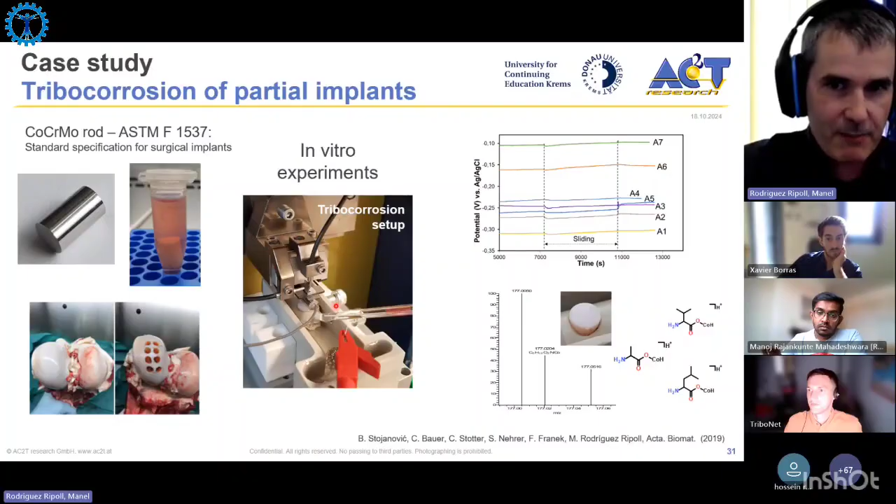And this drop of OCP means that we are having metal release, so cobalt, and we could also check, for example, using high-resolution mass spectrometry, that this cobalt was found to be bound to amino acids. So you can also use these tribocorrosion methodologies with in vitro setups for tracking biomedical implants or evaluating the performance of biomedical implants in vitro. So these tribocorrosion setups are very powerful. It's very important to use them when you want to evaluate materials for tribocorrosive environments.

So never rely on separate corrosion and wear assessment. It should always be done in combination. It doesn't matter if you measure OCP or current or anything, even if you don't measure anything, as we saw in the most simple experiment, but you should have tribocorrosion conditions.